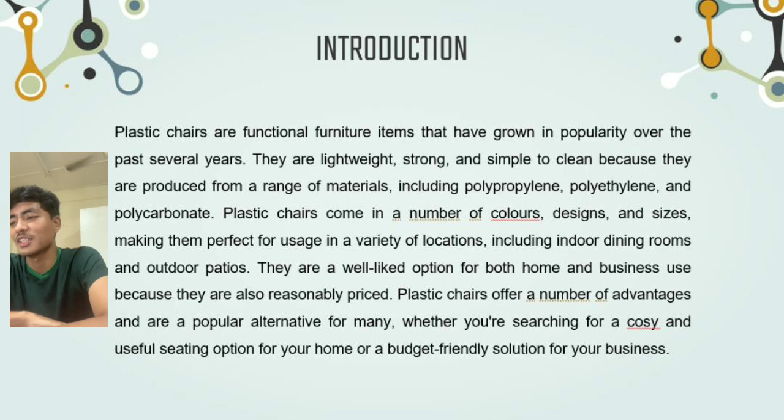Plastic chairs offer a number of advantages and are a popular alternative for many, whether you are searching for a cozy and useful seating option for your home or a budget-friendly solution for your business.

So the next slide is description. This is our description for the plastic chair product. The material that we'll use to make a plastic chair is polypropylene. Second is the type of machine used to make the plastic chair: we use an injection molding machine.

An injection molding machine is a manufacturing machine used to produce plastic parts and products by injecting melted plastic material into a mold. It consists of a hopper, barrel, injection unit and clamping unit. The melted plastic is heated and injected into a mold cavity which cools and solidifies. After the plastic has cooled and hardened, the mold is opened and the finished part is ejected from the mold.

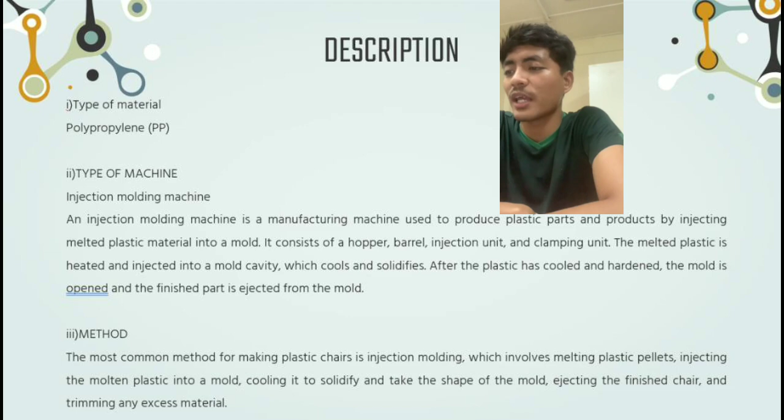The third one is the method. The most common method for making a plastic chair is injection molding, which involves melting plastic pellets, injecting the molten plastic into a mold, cooling it to solidify and take the shape of the mold, ejecting the finished chair and trimming any excess material. The third slide is the flow chart.

First is material preparation. The second one is injection molding. The third one is cooling. The fourth one is ejection. The fifth one is finishing. The sixth one is assembly. Last but not least is quality control, and then packaging and shipping.

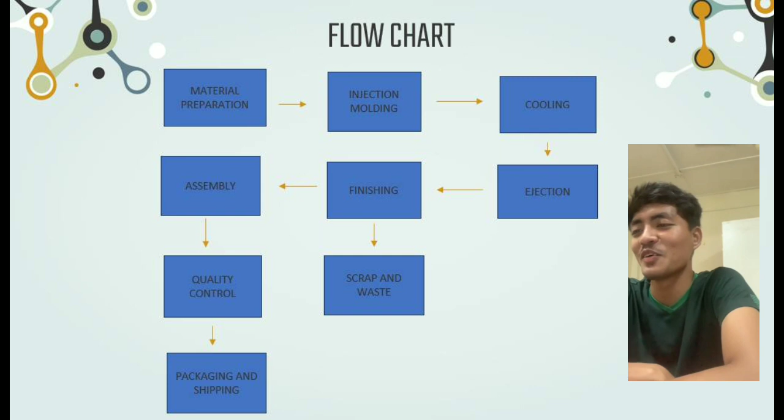We go back to finishing. If we do finishing, it will have scrap and waste. The next slide shows an example of the machine that we use to make the plastic, that is the injection molding machine.

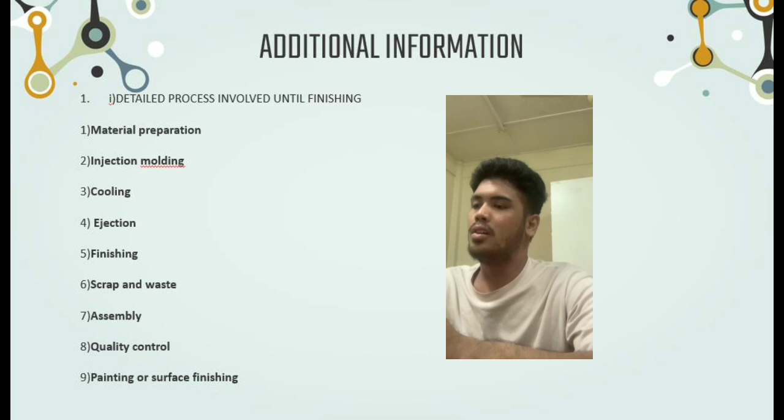Additional information: detailed process involved until finishing. Number 1, material preparation. Number 2, injection molding. Number 3, cooling. Number 4, ejection. 5, finishing. 6, scrap and waste. 7, assembly. 8, quality control. And last, 9, painting or surface finishing.

This is the standard: material requirements, manufacturing standards, safety standards, environmental standards and legal compliance are all part of the standards for producing plastic chairs. The chairs are made with safety, sturdiness and environmental responsibility in mind, as well as the demands of the market and the end customers.

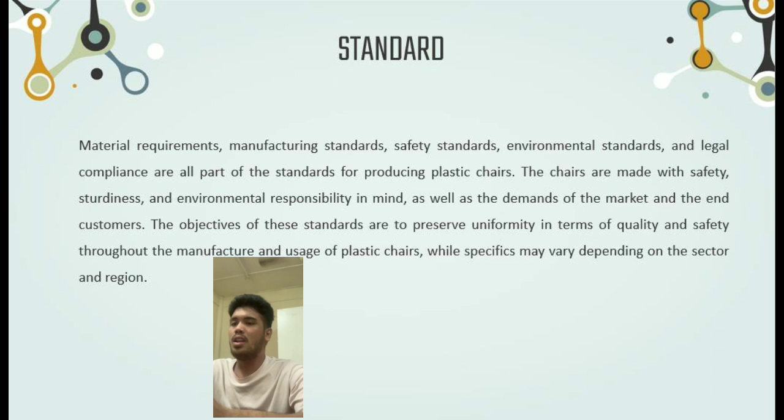The objective of these standards is to preserve uniformity in terms of quality and safety throughout the manufacture and usage of plastic chairs, while specifics may vary depending on the sector and region.

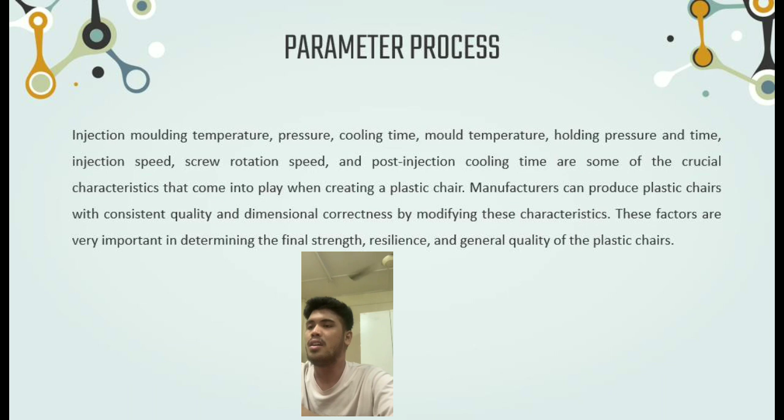These factors are very important in determining the final strength, resilience, and general quality of the plastic chair. Discussion, number one.

For advantages: high efficiency. Number two, cost effective. 3, wide range of materials. 4, high dimensional accuracy. 5, low scrap rate.

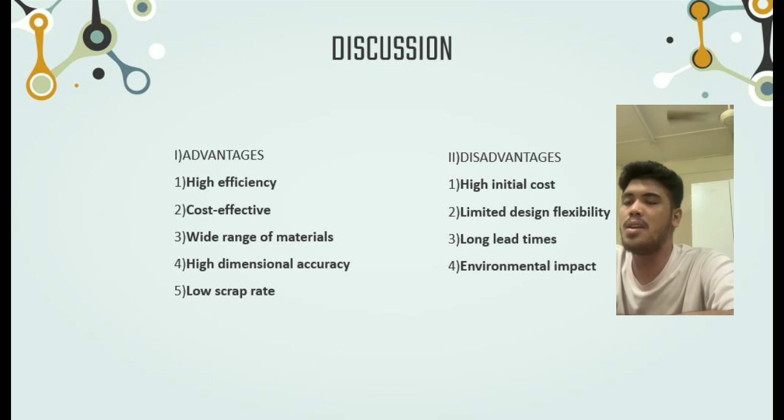Number two, disadvantages: number one, high initial cost. 2, limited design flexibility. Number 3, long lead times. Number 4, environmental impact. Defects: sink marks, warpage, flash, short shots, burn marks, gas trap.

Blow molding is a common industrial technique for producing plastic bottles. It involves forming molten plastic into a bottle using a mold and pressurized air.

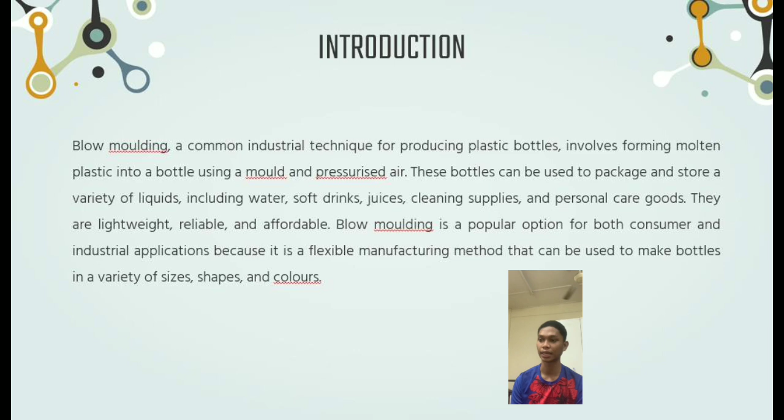These bottles can be used to package and store a variety of liquids, including water, soft drinks, juice, cleaning supplies, and personal care goods. They are lightweight, reliable, and affordable. Blow molding is a popular option for both consumer and industrial applications because it is a flexible manufacturing method that can be used to make bottles in a variety of sizes, shapes, and colors.

Descriptions: the first type of material to make a plastic bottle is polyethylene terephthalate, which is PET.

Next, type of machine: we use blow molding machines. Extrusion, injection, and stretch blow molding machines are the three primary types of blow molding equipment that are frequently used to produce plastic bottles. Extrusion blow molding machines are suitable for high volume production of simple bottle shapes, while injection blow molding and stretch blow molding machines are used for lower volume production of more complex bottle shapes. The choice of machine depends on the specific requirements of the product and the production volume.

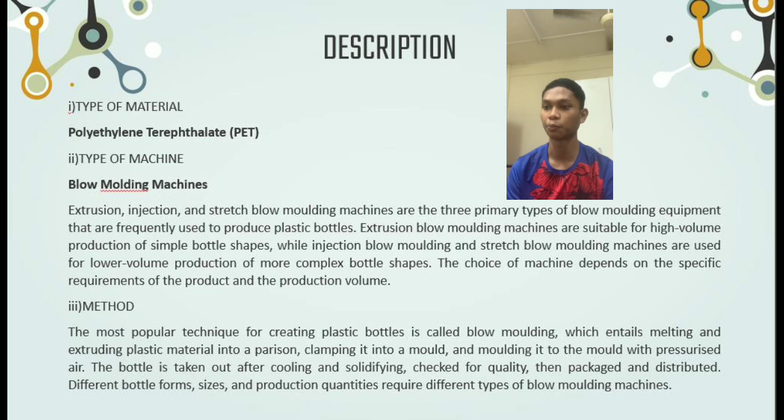Number 3 is method. The most popular technique for creating plastic bottles is called blow molding, which entails melting and extruding plastic material into a parison, clamping it into a mold, and molding it to the mold with pressurized air. The bottle is taken out after cooling and solidifying, checked for quality, then packaged and distributed. Different bottle forms, sizes, and production quantities require different types of blow molding machines.

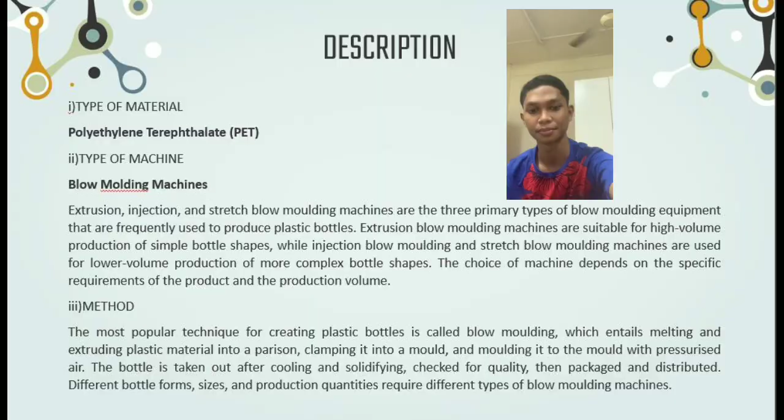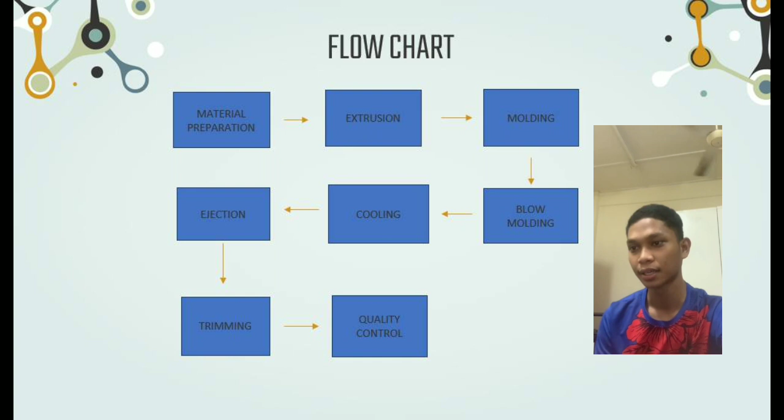Next, additional information. Number 1, detailed process involved and finishing: material preparation, preform production, loading the preform, heating, stretch blow molding, cooling, ejection, and quality control.

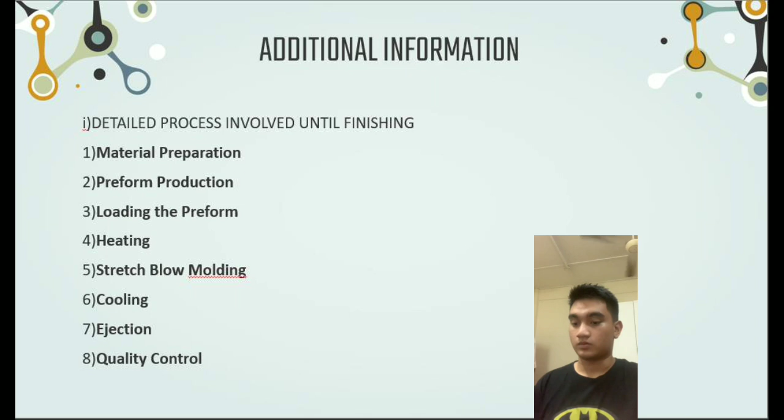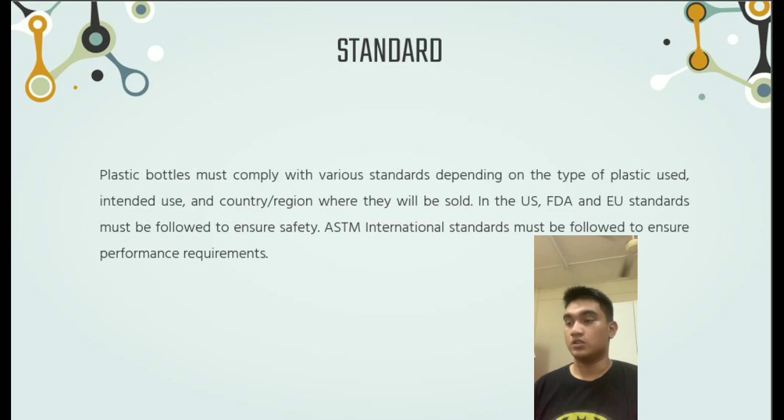Next, standards. Plastic bottles must comply with various standards depending on the type of plastic used, intended use, and country or region where they will be sold. In the US, FDA standards and EU standards must be followed to ensure safety. ASTM international standards must be followed to ensure performance requirements.

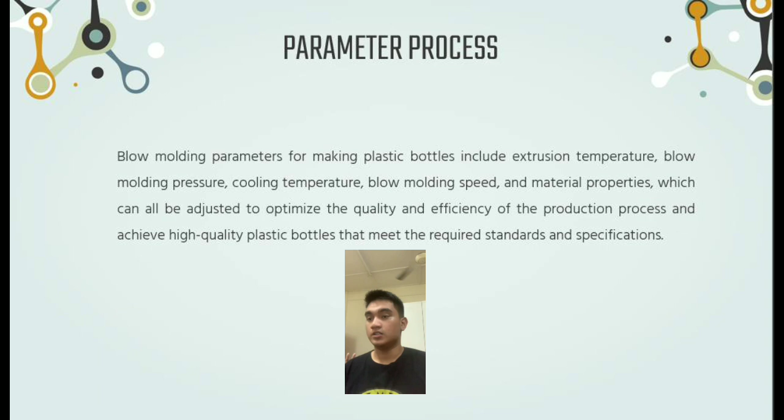Next, parameter process. Blow molding parameters for making plastic bottles include extrusion temperature, blow molding pressure, cooling temperature, blow molding speed, and material properties, which can all be adjusted to optimize the quality and efficiency of the production process and achieve high quality plastic bottles that meet the required standards and specifications.

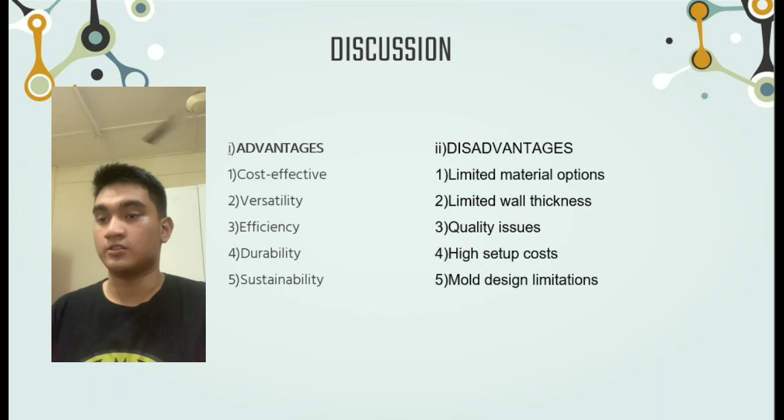Next, discussion. One advantage: cost effective, versatility, efficiency, durability, sustainability. Disadvantage: limited material options, limited wall thickness, quality issues, high setup cost, mold design limitation.

Next, defects: thin spots, flash, splay, pinhole, warping, stress cracking.

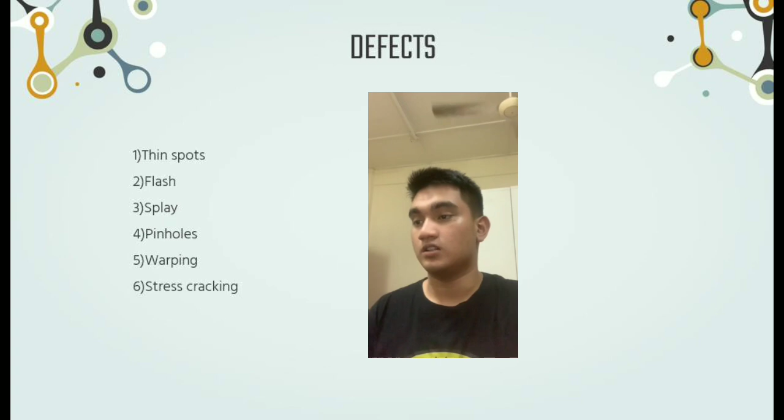Summary and conclusion. Both blow molding and injection molding are common manufacturing techniques in the plastic industry, each with unique benefits and drawbacks for creating various products. Making plastic chairs with injection molding is a common practice since it enables complex design and high precision with reliable quality. Meanwhile, blow molding is a favorite technique for making plastic bottles due to its great efficiency, adaptability, and affordability for mass manufacturing.

To achieve the best outcome, both procedures necessitate careful consideration of the process variables, material characteristics, and quality control. Although both procedures have their pros and cons, they are necessary to satisfy the various demands of contemporary consumers for a wide variety of plastic products.